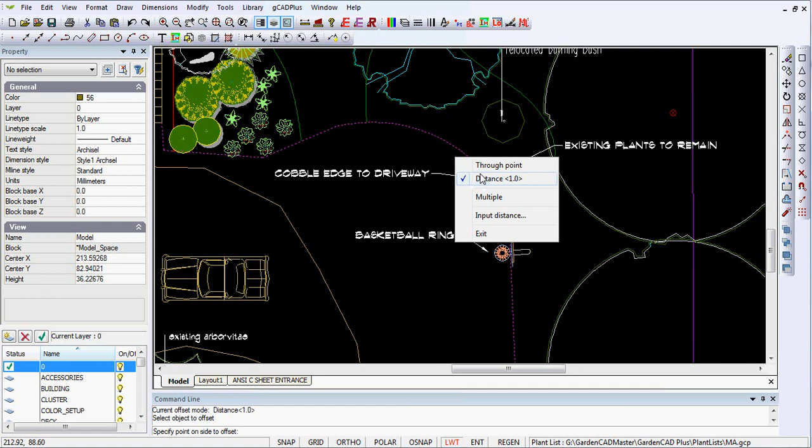So we could use, let's unselect all, we could use the modify and offset command to create that border for the cobbled edge. The object to offset is the polyline that we've just looked at, and now to specify a point on the inside, we can right click and set a distance value of whatever value we think is reasonable. We'll leave it at 1 foot for the moment.

So we then click on the side that we want the offset to be, and so the cobbled edge could go through there. We could actually undo that, a foot seems a little bit large to me, so let's repeat modify and offset.

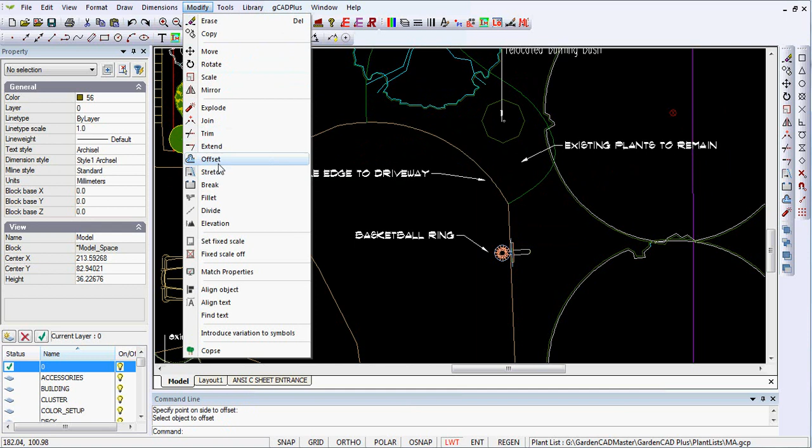We pick the line again, I right click and right click again and go to the distance here and type 0.75, and now we can indicate the side we want it on, the inside. So there's the cobbled edge, and we may or may not want to change the position of the basketball ring here.

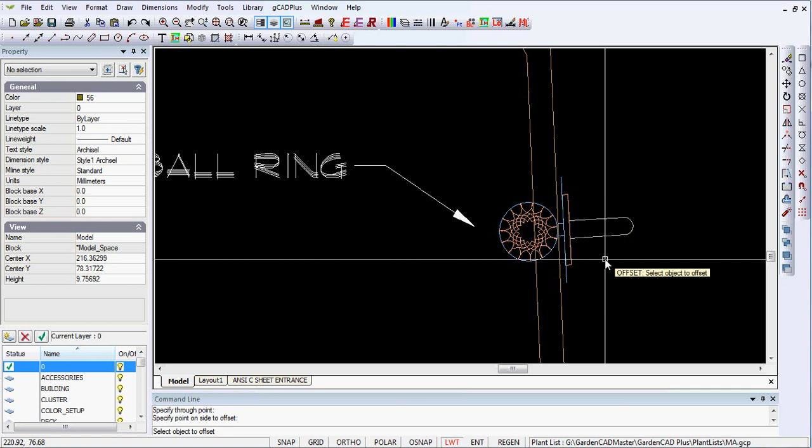If I select the ring, you might see that it's not oriented in the way that we want it. We need to exit from the offset. The orientation may not be quite what we want. So if we zoom in, we can spin the basketball ring in any direction that we want and line it up. I think, in fact, it was pretty good.

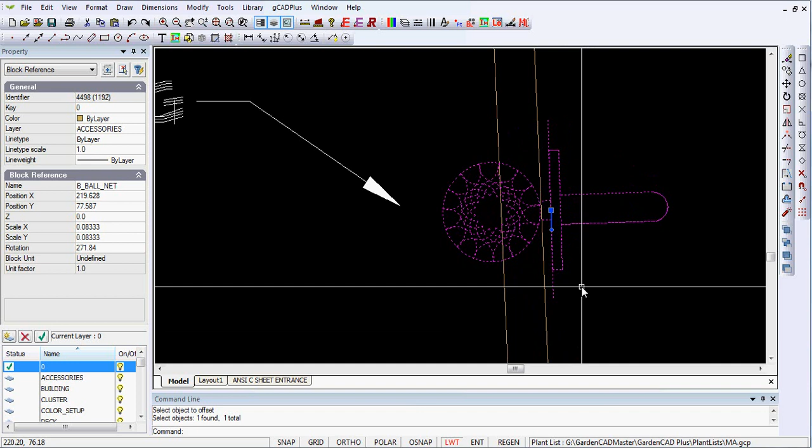So there's the basketball ring in place. You might or might not want to move it in to sit on the cobble, but I think it will be better mounted on a pad in the garden proper.

The other thing to note in the driveway area is that we might want to show some hatching in there to indicate that it's going to be paved. Let's imagine it's being paved with some crushed rock. So what we would do is draw and select hatch. What I've done is to draw a polyline around an area underneath the car, and you'll see the effect of that in a moment. So we select the object to hatch, which is that one, then right click, up pops the hatch box.

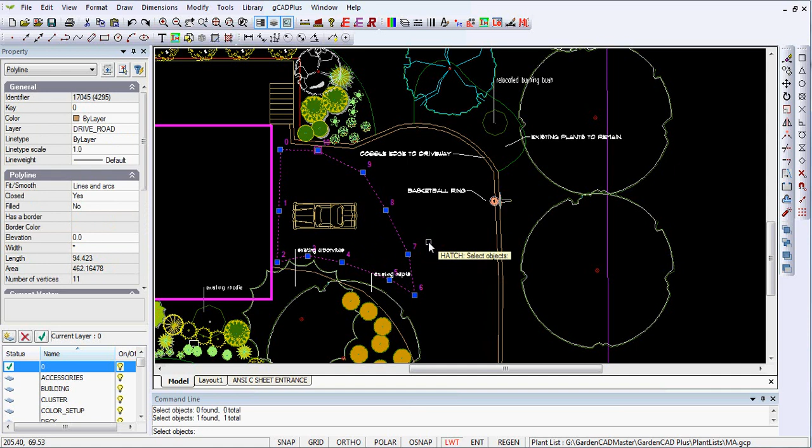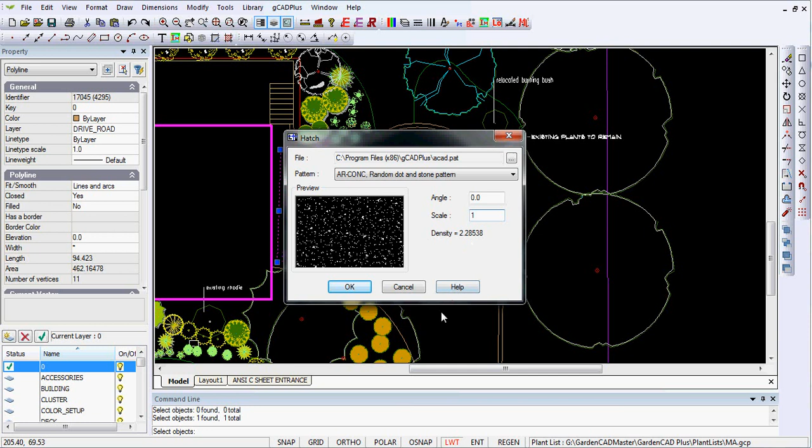So there's the hatch pattern gone in, and what I can do then is remove the polyline that delineated that area, and I might want to then bring the motor vehicle symbol on top, but you know how to do that.

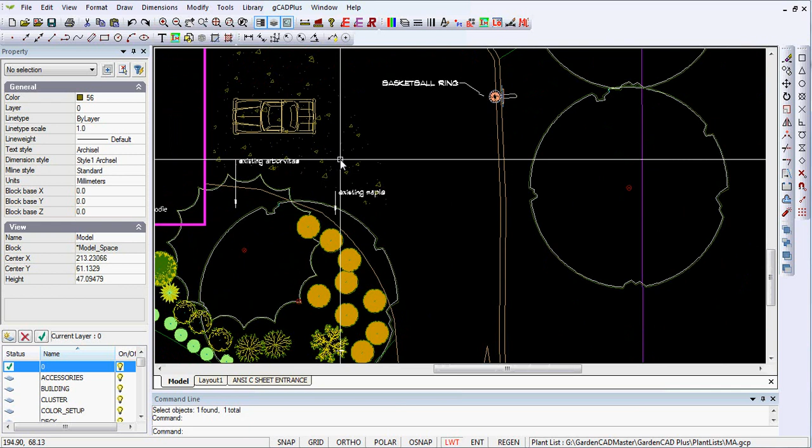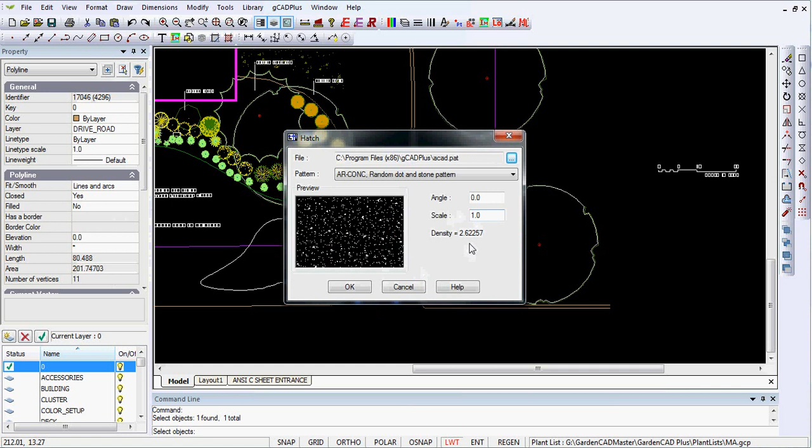So we have another zone in the driveway here that we want to hatch. So if I right click, I can select the last command, which I thought was hatch, but it was in fact erase. So we draw, hatch, pick the hatch pattern area. We can live with the same density and OK that, and then again remove the polyline that showed it. So now we have just a generalized indication that that area is going to be hatched, and that should work reasonably well.

Even though your CAD program can hatch over a large area, it's better to handle it in that way. We could just do the modify and offset again, pick that line and offset, and there's some cobbled edging around the driveway. So our design is taking shape.

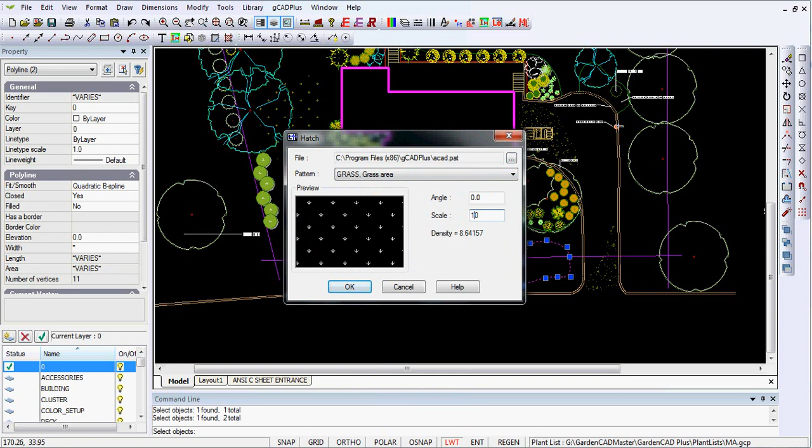I've got another couple of polylines here with some grass hatching, so let's finish that off. We'll exit from our offset, draw, hatch, pick the two entities this time, up pops the box. We want a grass pattern, and we want a scale that will settle on around about 2. So if we push this to maybe 15 or thereabouts, we'll get, there's 15. We'll see what that gives us.

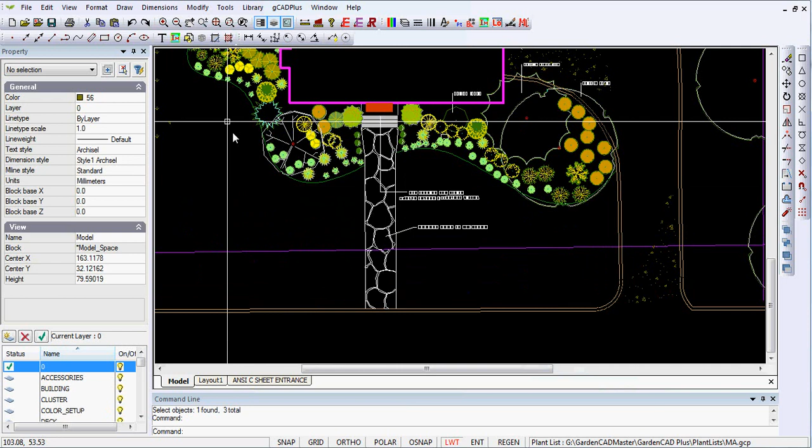And that gives us a hatch pattern that's far too spread out. So let's bring it back from 15 to say 5. And that looks reasonable. Let's remove the border there. Whoops, I'll undo that because I had the hatching itself selected. So we only want to remove the border, and we're done. So we've now got some hatching.

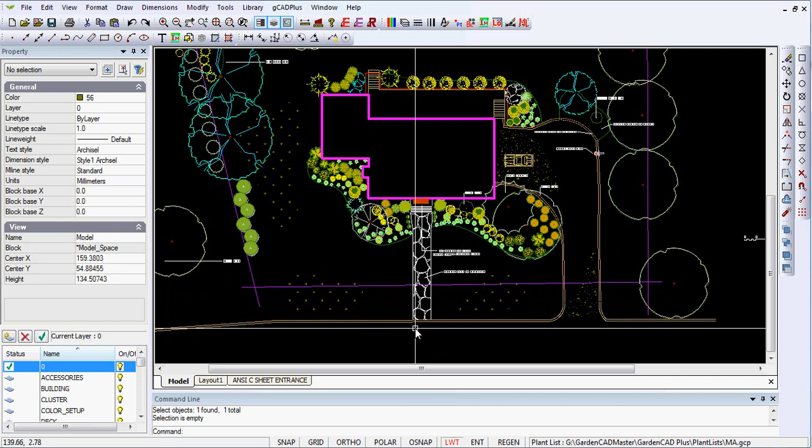Now when I look at that, I can still pick the hatching and move it across like so. That showed you the benefit of just hatching a single area at a time. It gives you more flexibility in moving things around. So our design is taking shape.